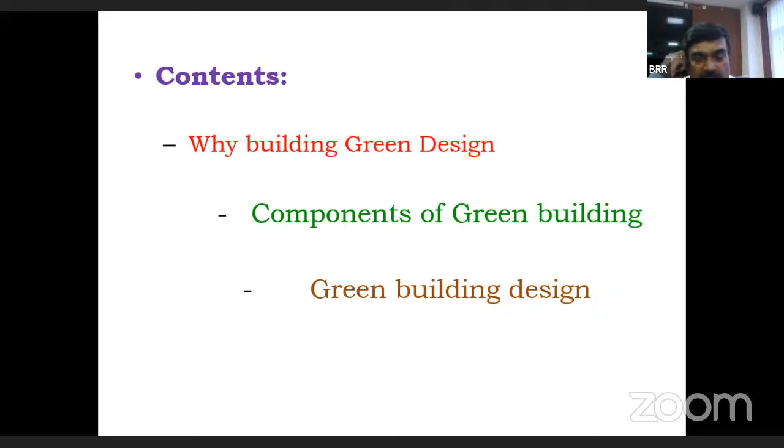So why do we need a green building? Because day by day we are urbanizing, and more than 60% of the buildings, offices, or houses that exist today are yet to be built.

Whatever building stock we will see in 2030, the present stock is only around 40%. The next 60% will be added by 2030. By 2050, the built-up area of India may be around 4 times the current mass. This is a study by the Ministry of Urban Development that indicates the demand for buildings and the general requirements for building design. This gives us a template for how we should proceed further.

Construction is an essential part of development. We need construction for everything, every infrastructure, buildings, factories, or whatever. Construction increases the economy, increases employability, and is required for economic growth.

At the same time, construction is also responsible for consuming huge energy. Similarly, when you consume energy, you emit carbon emissions. So construction is, on one side, a growth engine, but on the other side, it is a very big pollutant. For example, 30% of raw material used in construction is eventually turned into waste.

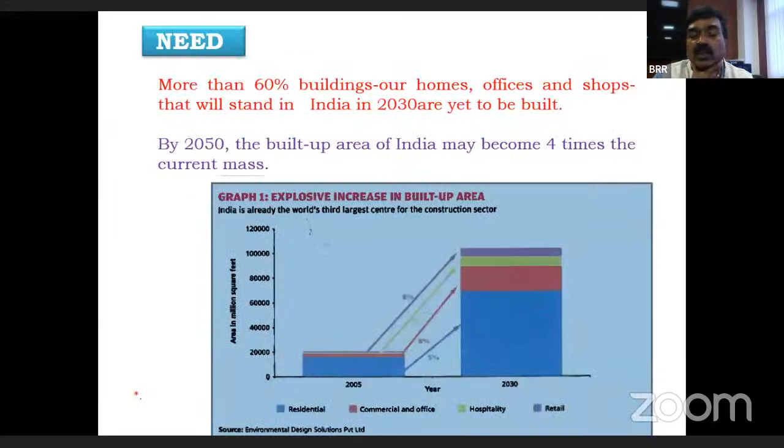The building stock is going to be 4 times or more by 2050.

We find that more urbanization causes the urban heat island effect, which we see in urban areas where pavements, roofs, everything is built with concrete, asphalt, or other materials. There is a lot of heat produced, a lot of emissivity between different materials buildings are constructed with, and a lack of evapotranspiration because there is no vegetation.

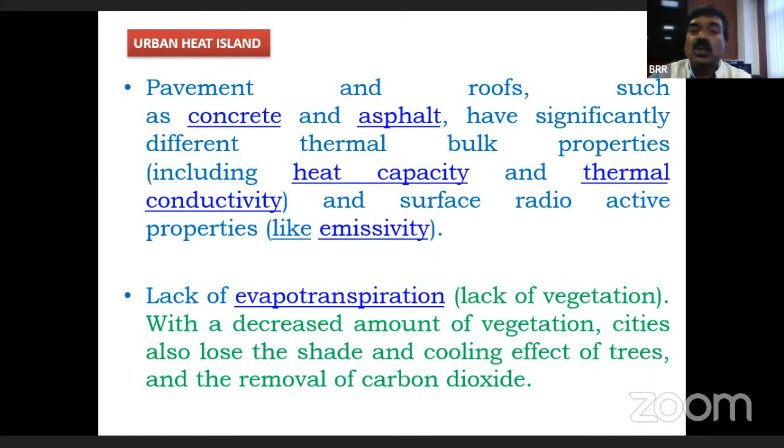There is a lot of increase in moisture loss into the atmosphere, which increases the heat, and the whole area turns into a heat island. This is the concept that huge urbanization leads to urban heat islands in urban areas.

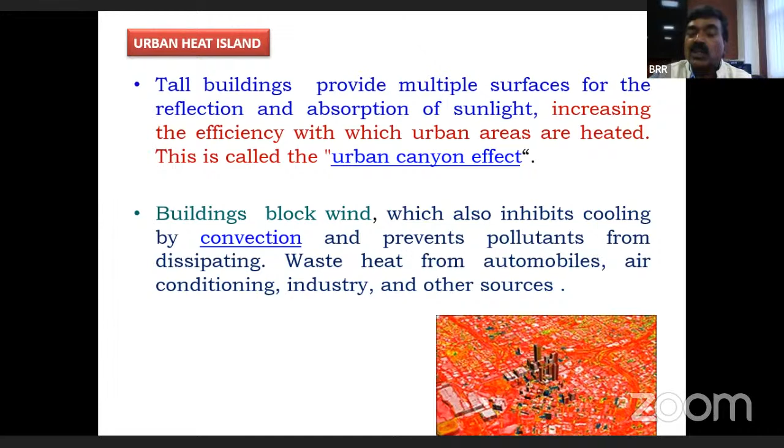Tall buildings provide multiple surfaces for reflection and absorption of sunlight, increasing the efficiency with which urban areas are heated. This is called the urban canyon effect. Buildings block wind, which inhibits cooling by convection and prevents pollutants from dissipating. Waste heat from automobiles, air conditioning, industry, and other sources also adds to the urban heat island.

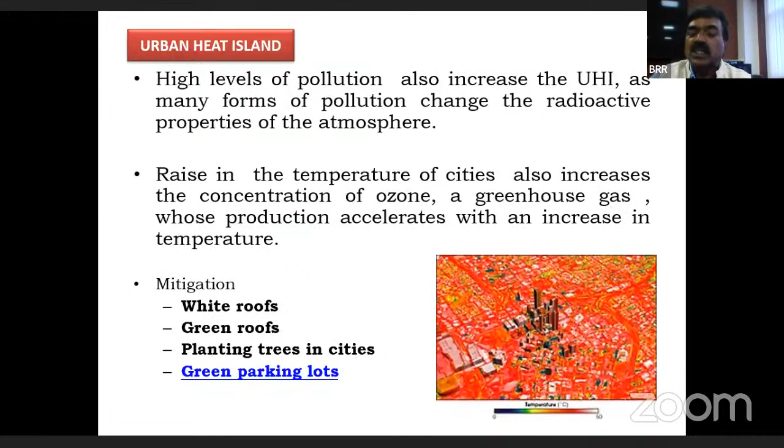High levels of pollution also increase the urban heat island, mainly due to radioactive properties in the atmosphere, causing a rise in temperature and increase in ozone concentration. These are some effects of urban heat island, but we can think of mitigations such as white roofs, green roofs, planting trees, or green parking lots. As civil engineers, we will be concerned with white roofs and green roofs.

When we talk about construction and building activity and building materials, every stage has got some environmental effect, right from the mining of the material, maybe because of land erosion, water pollution, or deforestation, or manufacturing of the material where a lot of energy is consumed, transportation of the material, energy is consumed, and the building itself directly involves the building materials.

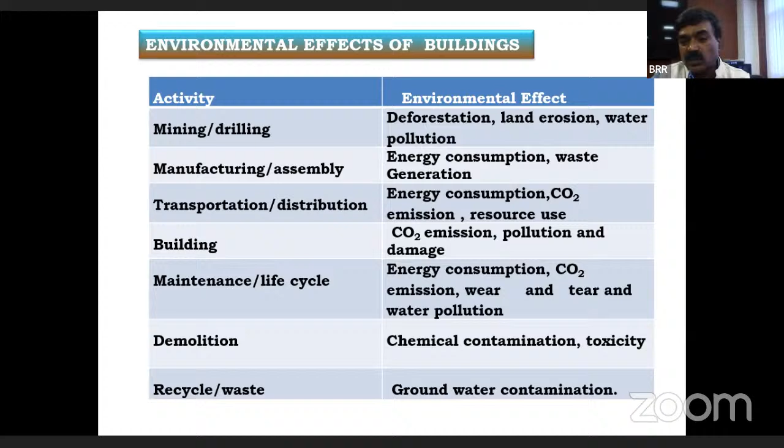You consume a lot of energy for air conditioning, lifts, power, mechanical components, and maintaining the building. Then demolition also - this is one area where demolition wastage should be taken into consideration while making a design. Then we have recycled waste also, like groundwater getting contaminated with continuous building.

Then we think, what is a green building? Green building is the practice of increasing efficiency by which buildings use resources, energy, water, and materials while reducing the building's impacts on human health. We use minimum resources and reduce the impacts on human health. They ensure that waste is minimized at every stage during construction, operation, and the entire life cycle cost of the building.

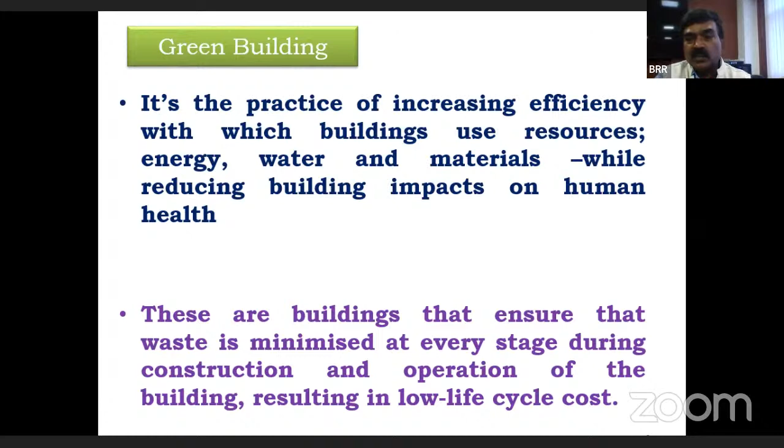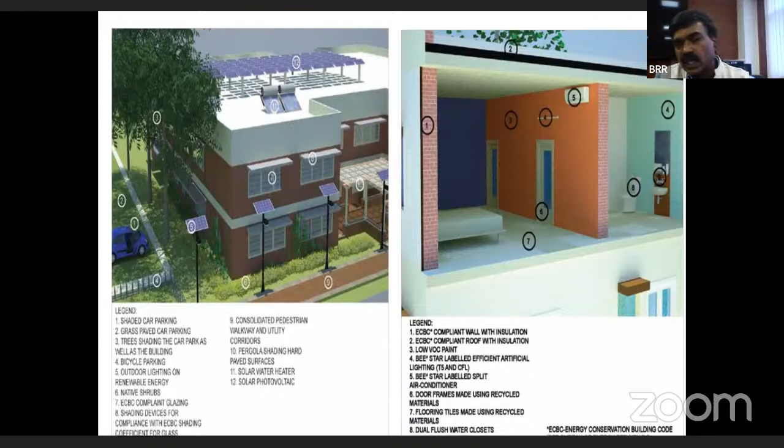These are the small components, of course. There are small elements - how do we add some things for making a building green, something like shades, sun shades, green shades. You are adding new renewable energy sources.

This is lighting, of course. This is reuse of water - using the reused water as a third pipeline. We generally use the gray water also for flushing the tanks. So we are reusing the water.

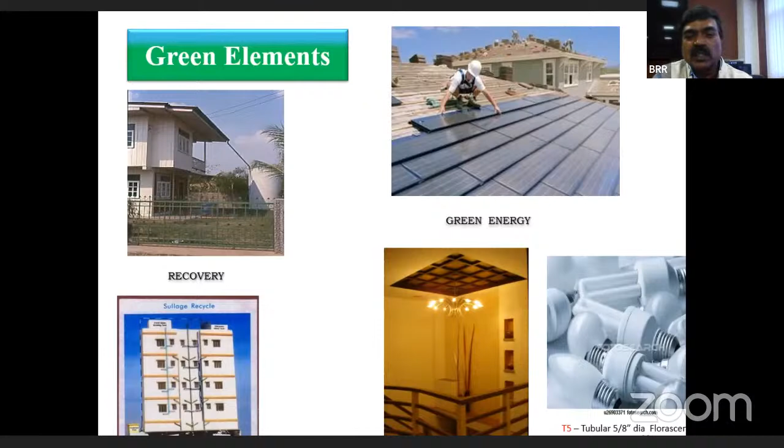Some shading elements for the green building.

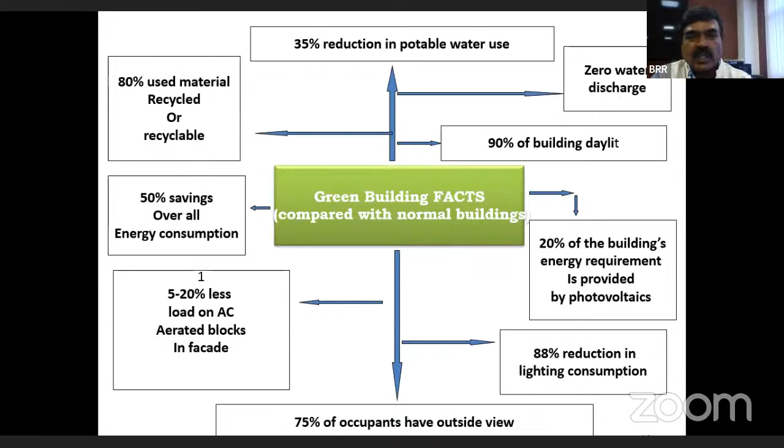There are two different rating systems for greening in India - generally we go with that. One is Griha, the other is LEED. LEED is generally now taken up by IGBC, so we call it IGBC rating and also Griha rating. They take so many parameters into consideration while rating a building - site planning, water management, waste management, health and well-being, building operation and maintenance, energy and atmosphere, and sustainable building materials. They use material inputs on all these parameters.

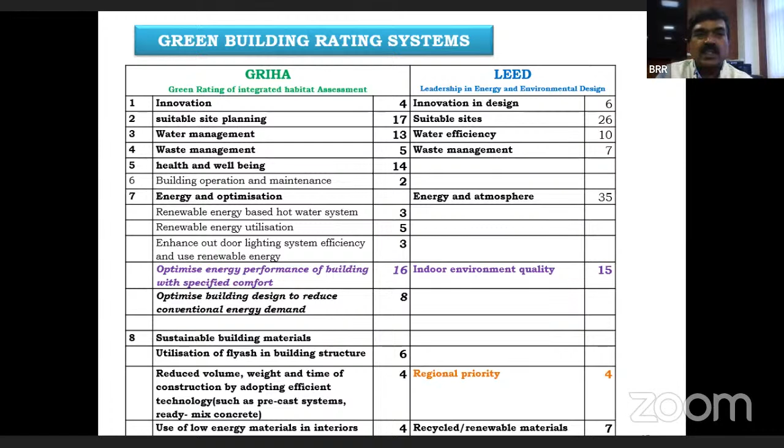So it needs sustainability in design and construction. What we need is to have the sustainability factor in design as well as in construction.

It is also a legal obligation on our part to see that these buildings are built green, because Environmental Protection Rules 2006 says they need to have environmental clearance. Buildings above 20,000 square meters or townships covering more than 50 hectares necessarily have to have an environmental clearance. So there is a legal obligation also to design or execute a building green.

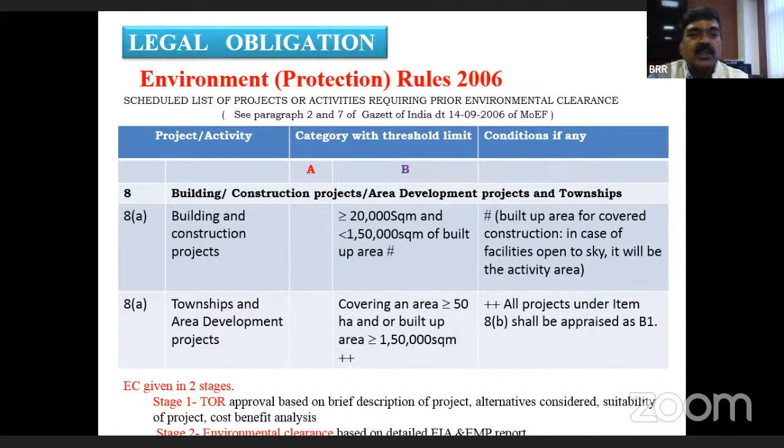Then how do we go with sustainable construction? What is sustainable construction? Sustainable construction is using natural resources in such a way that they meet the economic, social, and cultural needs, but do not deplete or degrade the resources to the point that they cannot meet the needs of future generations. We must consume within the available limits without foregoing the requirements of future generations. This is how we define sustainable construction.

Then we have different methods of construction - generally traditional construction method, conventional construction method, and the latest fast track construction method also. We have different materials - indigenous materials, locally produced materials, and even industrially produced materials.

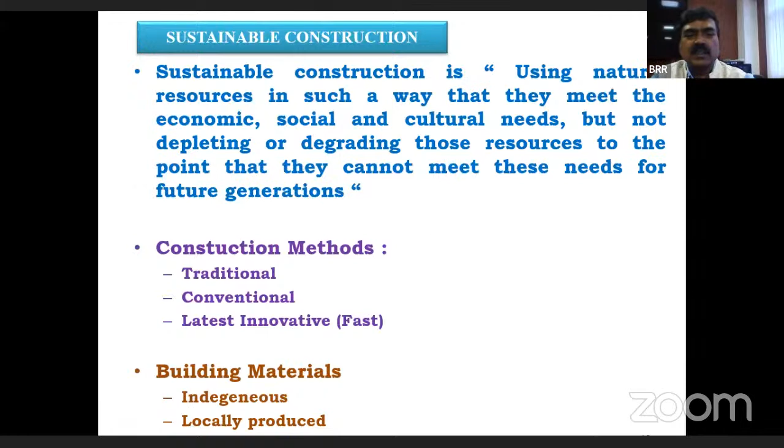Screen percentage, madam? I think the screen sharing is low. Sir, screen percentage of screen sharing? Okay, okay.

So the UN also had got into that, and the International Standards Organization has established some set of indicators for assessing the sustainability and performance of new or existing buildings, with relation to design, construction, operation, maintenance, refurbishment, and end of life.

All parameters have been, at every stage of construction there is a need for sustainability, and ISO 21929-1:2011 has come up with some 38 core indicators by which we can assess the performance of the building. Some of the factors are safety, functional performance, material use, power and water consumption for construction, pollution during construction, operation and disposal including waste disposal, carbon footprint, thermal comfort, indoor air quality, maintainability, life cycle cost, impact on the economy, and like that.

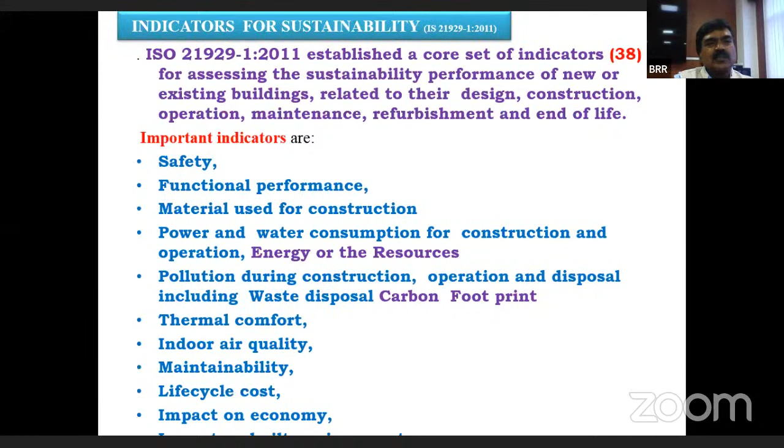When we talk about sustainability, it is dealt very thoroughly in Part 11 of NBC now. I think everybody is conversant with this sustainability factor, and you may already be dealing with these things. Sustainability generally includes sustainable design, sustainable use of material and alternate material, and optimizing building envelopes. This may be a little new for you. It also includes optimizing building services, sustainable building services, water and waste management, and refurbishment and demolition. There are also sustainability factors not dealt with in Part 11 of NBC, but included in the old NBC, like siting, built environment, landscaping, habitat planning, lighting, fenestration, ventilation, services, and functional performance. These are other factors mostly dealt with by architects in designing a sustainable building.

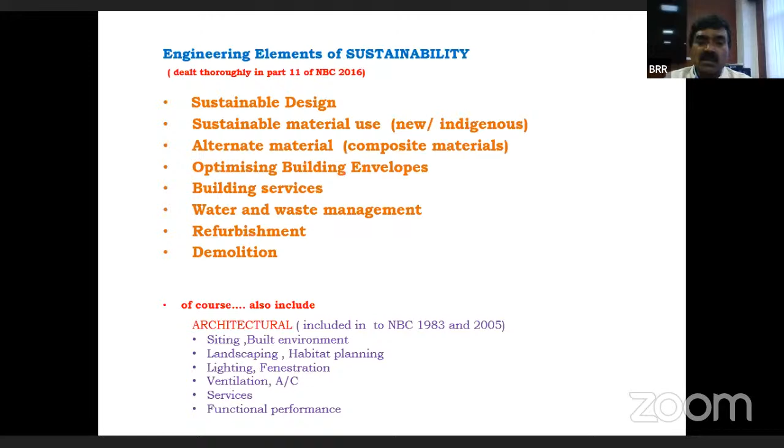Now the question is, what is sustainable design or environmental design? Generally in civil engineering, we are taught in engineering colleges that structural design means addressing the requirement for failure. That is generally strength - we check for strength, then we check for stiffness and dimensional stability, and all other forces like bending, earthquake forces, or even temperature stresses. So basically our activity in civil engineering or structural engineering has been limited to checking failure by fracture, or checking dimensional stability or instability, resistance to deformation. Deformation may be either by sliding, earthquake, lateral forces, bending, or due to creep. These things are dealt with in our system.

Then we have some parameters of environmental issues which need to be discussed now, that can be added, like durability - the service life of a material under given environmental conditions - and sustainability. Durability is dealt with by a code, but sustainability is not yet dealt with by code. Sustainability means assessing the consumption of resources in designing a building - what are the inputs you are taking into your design? You take cement, steel, concrete. Majority of our structural design deals with only cement, sand or fine aggregate, and steel. These are the only two materials we generally talk about. We should talk about all the material inputs and the energy required to bind and build them, and the water required to bind and build them.

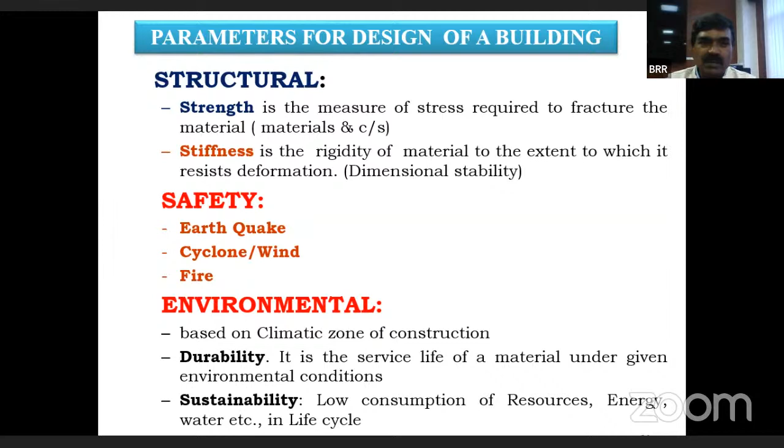That is the energy consumption and the carbon footprint - the consumption and carbon footprint that it is going to leave. Every cubic meter of brick leaves around 706 kgs of carbon dioxide. So when taking these parameters - elastic modulus and strength - density and elastic modulus are taken into consideration to arrive at a required strength or to safeguard against required forces. So these two factors, energy and carbon, also need to be checked to address minimum consumption of energy and least carbon footprint.

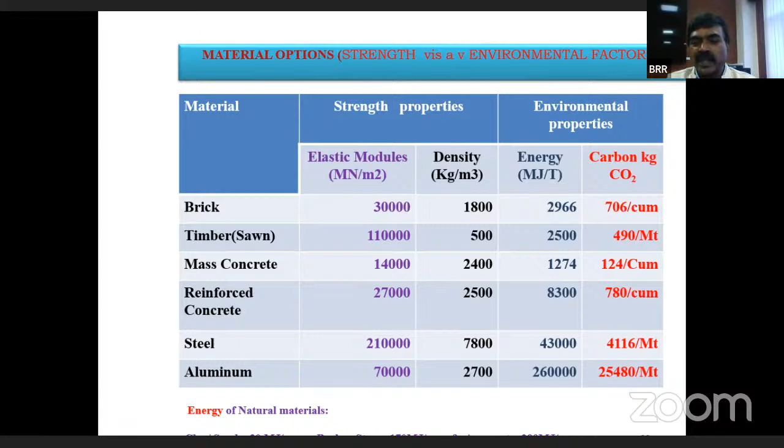We also have material options to consider. We will see how energy consumption varies from material to material, since all are civil engineering materials. We categorize all materials based on their energy consumption or embodied energy - high energy materials, very high energy materials, medium energy materials, and low energy materials.

Generally, sand, aggregate, and fly ash are all low energy materials. Medium energy materials are those manufactured locally, like clay bricks, tiles, concrete bricks, and timber - these are locally manufactured or prepared materials. High energy materials are steel, glass, lead, and cement, and very high energy materials are aluminum, plastic, copper, and stainless steel. There is a wide range of materials available for construction - it's not limited only to cement, it's not limited only to steel. We use every part of the material.

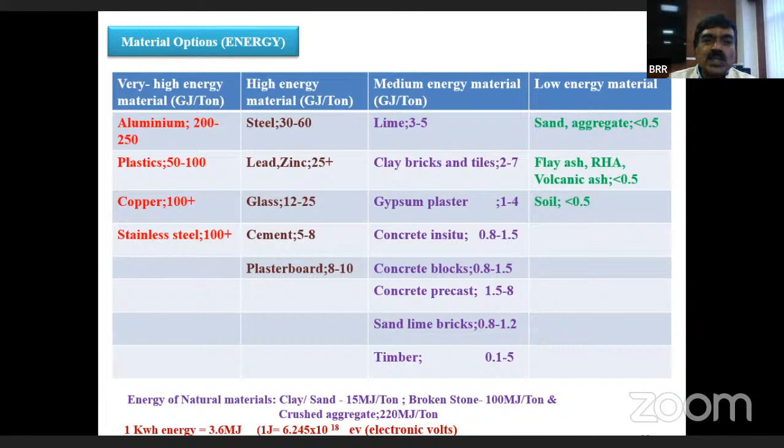Now we must know the embodied energy of each material to choose for our required strength. So when we are talking about strength, that is resistance against fracture, and when going for density - that is the parameter, density. When you are talking about density, you require a particular density of material or particular elastic modulus, E. Then you can choose a material from among these which has low energy content.

Even some of the materials, you can see the energy is getting very high. Why? It's because the majority of these construction materials have been industrialized. There were days when all materials required for building construction were available in a village. Now, no material is available in the village for construction of a building. Everything has to come from the town or city.

Even the majority of the cities don't have the material, and it has been industrialized. Industrialization of construction material has led to consumption of huge energy, especially for transportation and for the quality. For instance, transportation takes a lot of energy. If you want a steel plant, you can't find one in every town or district. You need to go at least 500 to 1,000 kilometers to get steel from a steel producing factory.

Similarly, industrialization of construction material has increased the energy consumption. So the idea that we want to tell is that locally produced materials have low embodied energy and they consume low energy. Next.

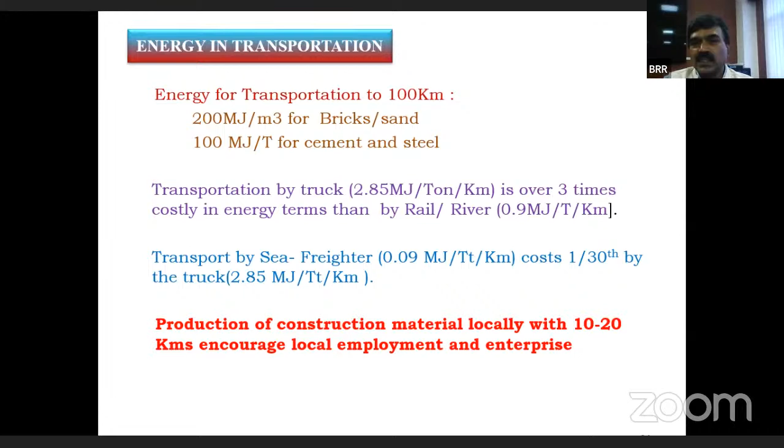The other factor I want to share with you is thermal comfort. This factor we engineers generally don't take into consideration, but nowadays everybody is talking about thermal comfort. In the earlier days, there used to be bigger wall thickness, bigger sections, to give capacity to the building envelope, the wall and roof. Those walling or roofing elements had higher thicknesses to have a greater capacity to transfer the heat.

Now you can't venture to have bigger thicknesses of walls and material components. So now everybody is going for RCC. The frame is always RCC. All the partitions are either glass, gypsum boards, or 9 inch or 6 inch brick walls. So thermal comfort has become a big issue.

The architectural inputs into thermal comfort used to be window size. There is a ratio in the code of floor area to window area, then cross ventilation, and the number of air exchanges in a given room, meaning the volume of air that comes in and goes out in a day. Number of air exchanges and direction of windows were taken care of earlier, but now because of space constraints that can't be done, and we have to think of other ways of meeting these things.

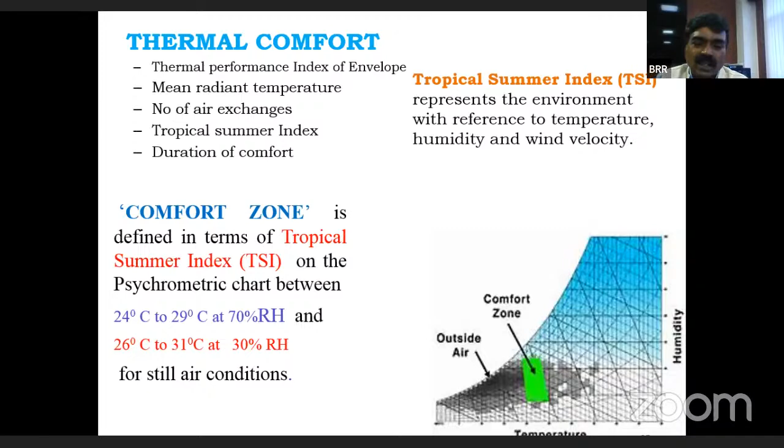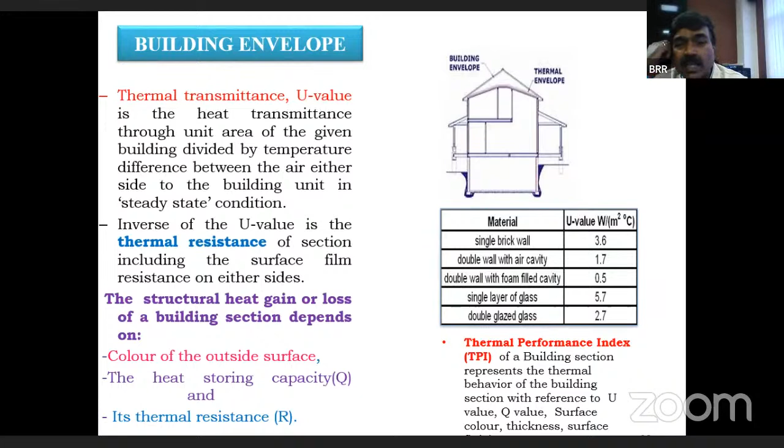So this is a building; of course, we call this a building envelope. Every building material will have some U value, the thermal transmittance, and then thermal resistance. They depend upon even the color coating outside the building, which is going to change the transmission of heat, the heat storing capacity of the building section, and the thermal resistance offered by the material. So every component has got different values. So when you select a building component, you must be thorough with these parameters of thermal transmittance and thermal capacity. Next.

So when the two buildings can give the same function and the same strength, the other parameter that comes in is the employment potential. Around 11% of the population depend on construction activity, and their livelihood is based on building construction. So when we design a building, one parameter that we can add is employment generation. Employment generation should be one of the parameters to select a building component, a building material, or a building envelope. Next.

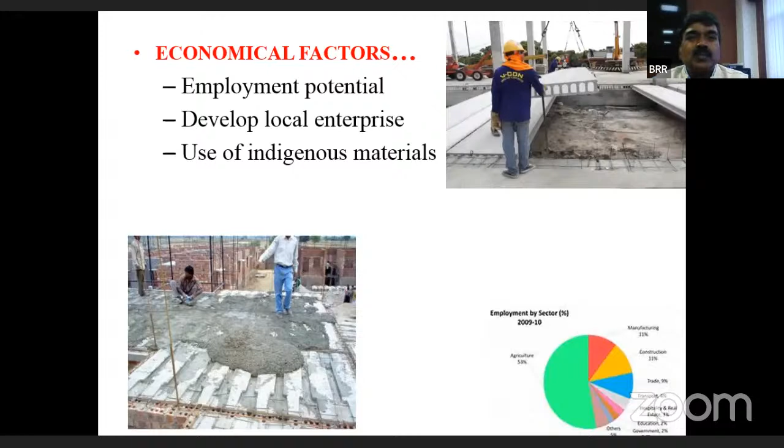Then, to design buildings, these are the parameters: strength, safety, durability, embodied energy. Every material has got some embodied energy. When you are designing a building, just make a list of how much energy each building component is going to consume: the metal, cement, sand, water, fly ash, the brick and all that. Then the embodied carbon or the carbon footprint.

Then the envelope performance. If you are going to design a building, you should not design only a frame and forget. Always we find that our structural engineers limit themselves to designing columns, beams and slabs. No. The number of elements in a building is going to be more than these 2-3 elements. There is going to be fenestration, walling, ceiling, flooring, there are services. So all those things make an envelope, and we have to check the performance of the envelope.

We can do that by the thermal performance index. This we can calculate for every envelope, and then you can assess the indoor environment. The tropical summer index also you can do. Then you look at the employment generation, the life cycle cost, which material costs what, and what technology can reduce the cost, and all these things you can do.

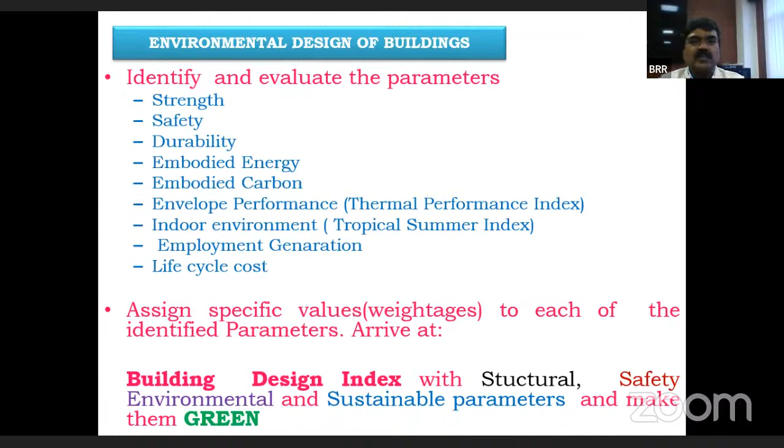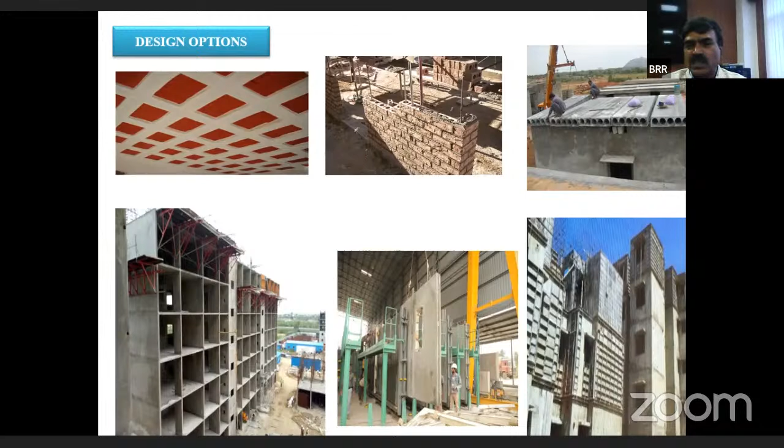Or you have the new method that you may be knowing, the shear wall system, where the whole concrete is poured at once, right from the slab to the foundation in one go. Within 3 days, you can raise a floor, or by every 7 days. You have increased the speed of the construction. The basic principles of strength and safety remain the same. The other parameters of indoor environment make much difference when you go for new materials like this. Next.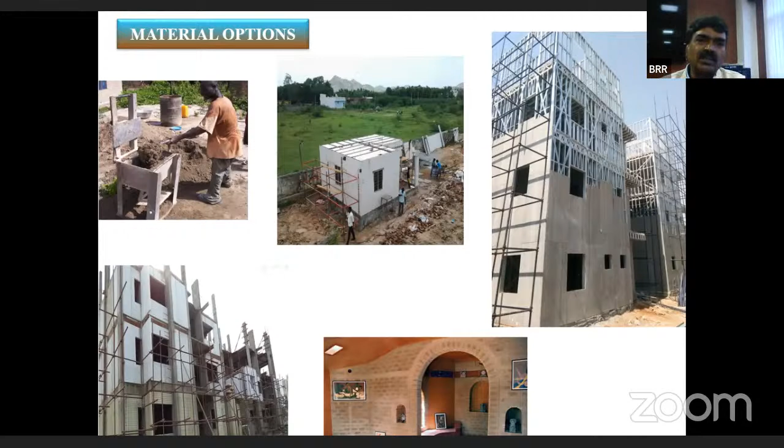Now there is one agency in the Ministry, Government of India, the Building Material Technology Promotion Council, BMTPC. They have come out with a parametric study. As I said, there is an ISO system where they have identified 36 parameters for sustainable construction. Here, they have arrived at some attributes by which the parameters can be finally selected: primary attributes, secondary attributes, and tertiary attributes.

Of course, in design, finally we have to arrive at the final cost and compare with the available material in the market: which one is going to cost us less, and which one is going to get it done faster. So time is another factor. Finishes, sustainability, maintenance, and life cycle cost have to be necessarily looked into while making a design. We cannot limit ourselves to the two parameters of strength and stability. All these attributes you have to add to your design parameters. Next.

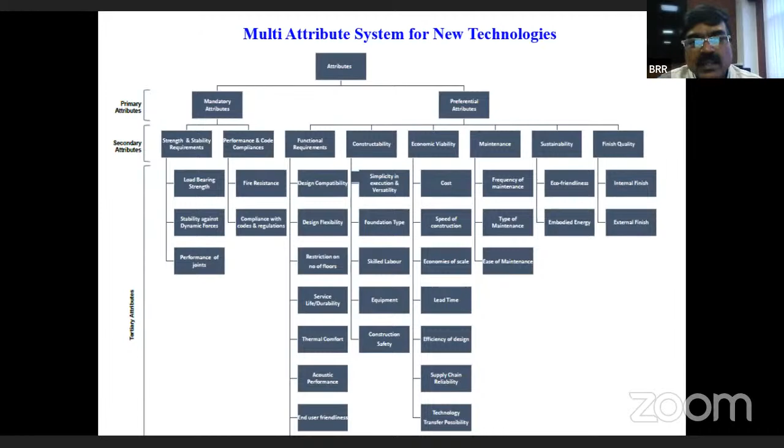This is how we check some of the parameters of different types of buildings and try to arrive at an environmental building index. We can say this particular building has an environmental index value of 1, this one 1.2, or -6, -4. The building with RCC shear wall and roofing has an environmental index of -6 compared to a recommended green building of 1.

A building with ordinary masonry has an environmental index of 0.9, nearer to the green building, but the building with shear wall and roofing is -6. From this data we can see it is the number of attributes that you add to your design that makes your building green. Next.

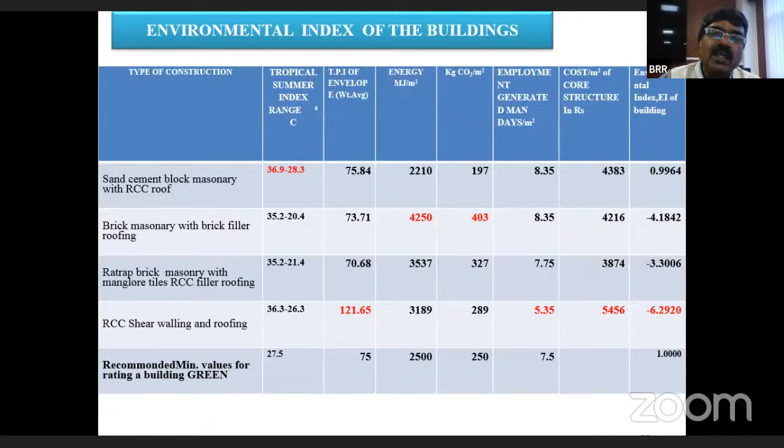I can say this is a small radar, or the radar you can draw. If you go towards the more technological inputs into the building, then you will be using more metal, glass, plastic, aluminum. When you come towards the normal usage, then you will be using the locally vernacular materials like stone, bamboo, timber. That reduces the energy, leaves a low carbon footprint, and it consumes more local materials. And there is employment generation being done there.

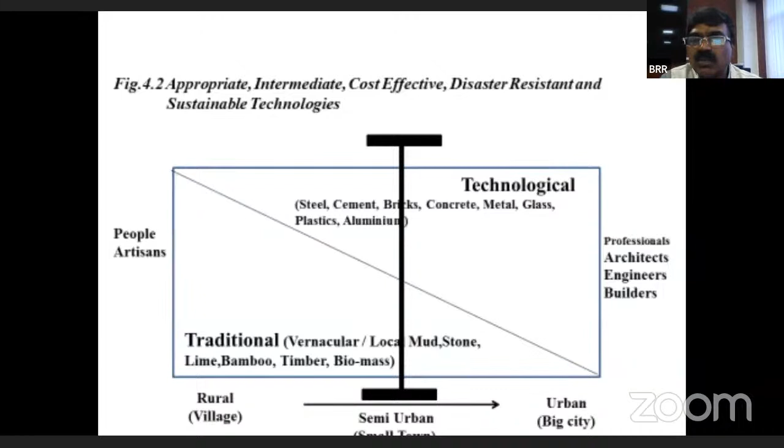When you go to the technological side, when you deal with plastic, aluminum and metals, you will be depending more on industrially produced materials, which will have a lot of carbon footprint. Comparatively, you can see around 16 to 17 times the carbon footprint to that of a local material. Next.

So this is what I wanted to add actually. Some parameters which I tried to add to the regular design for sustainable design of building. I can capsule them now: apart from the strength and safety, one thing is that we talked about energy, embodied energy of the material. Then we talked about the carbon footprint that each component of the material leaves. Then the third part that we talked about is the thermal performance index of a building section.

So when we talk of a building, we would divide the building into the building envelope, the envelope containing facades, walls, roof, flooring, and all that. Each element is to be checked for its thermal performance, and then the overall indoor environment, arriving it to the comfort zone. So we talked about the comfort zone. How do you arrive at it? How do you manipulate the materials required for the walling, roofing, and the building sections?